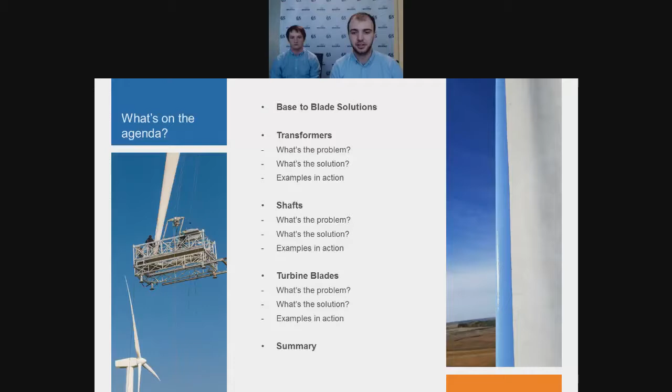So we'd just like to start with a broad overview of the variety of areas on a wind turbine where we can provide a solution. The way we've done this is we split the turbine into three main areas. Starting at the bottom, we've got the tower and the base. There's a variety of solutions here. Primarily, it's the use of liquid membranes for general corrosion protection and weatherproofing, but we've also got concrete repairs for the foundations of onshore turbines, as well as corrosion protection and things like splash zones for the floating foundations of offshore turbines.

Then we move up the turbine to the nacelle. This is where the magic happens and the electricity is generated. There's a variety of equipment here, most notably shafts, gearboxes, generators, and these are all liable to corrosion and mechanical damage. So we've got a variety of products that can help protect from future damage as well as repairing damage that's already there. There's also a few areas you might not have thought of, things like weatherproofing, inspection hatches.

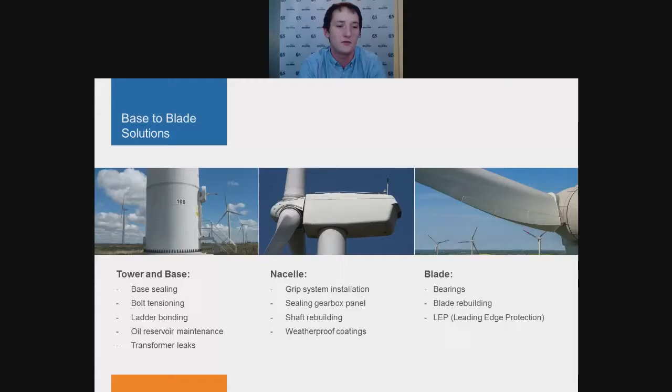And then after the nacelle, we've got the blades. These are the defining feature of the wind turbine. The most common application here is rebuilding the damaged blades and then applying a coating to protect them. But we also have a few solutions for the components where the blade attaches to the hub, such as the bearings. So what we're going to do now is take an application from each of these three areas and go into a little bit more detail on the problem and the solutions we've got.

So the first one, we'll start at the bottom of the turbine, is a piece of equipment that's always going to be present where you're producing electricity and distributing it, and that's the transformer. They're found in various locations around the wind farm. Sometimes they're even in the nacelle, they're not always at the bottom. But a common problem with these is transformer oil leaking from the cooling fins.

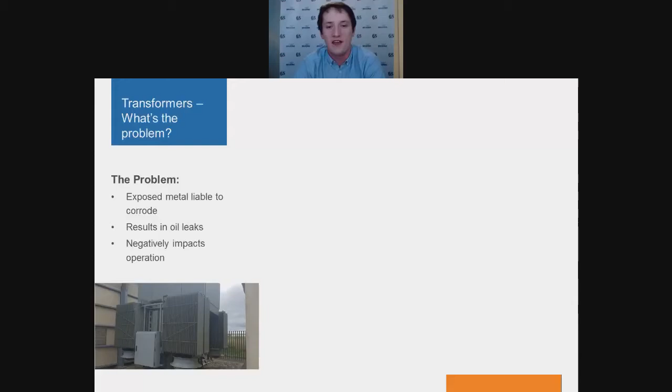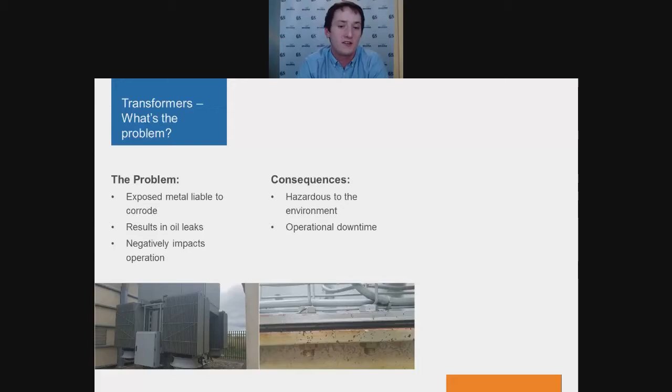The metal on these fins is normally protected with a relatively simple paint system, and that's quite easily chipped or damaged. When that happens, that allows the metal underneath to start to corrode. Left unattended, that will eventually go through wall and lead to cooling oil leaking from the transformer. That can lead to overheating of the transformer, which results in inefficient operation. And in the worst case scenario, it could mean the whole turbine needs to be shut down for maintenance.

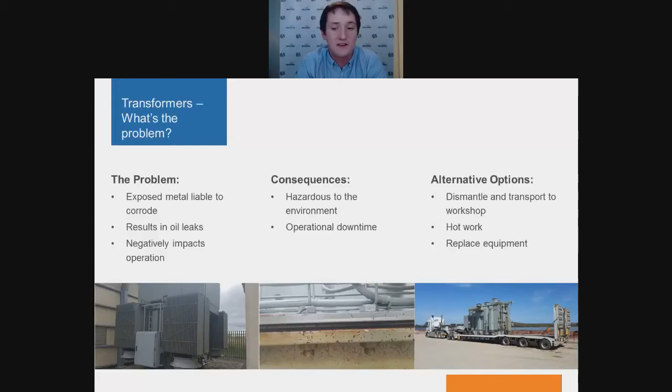In terms of alternative repair methods, there's a few options. First, you could take the transformer out of service into a workshop for repair, maybe remove the fin and weld a new one on, or weld some fresh material onto the defective area. Or, the most extreme option, you could completely replace the transformer. You could take it out and put a brand new one in. The majority of these methods are costly, not just in materials and labour, but also the amount of time that the turbine is going to be out of action and no longer generating electricity.

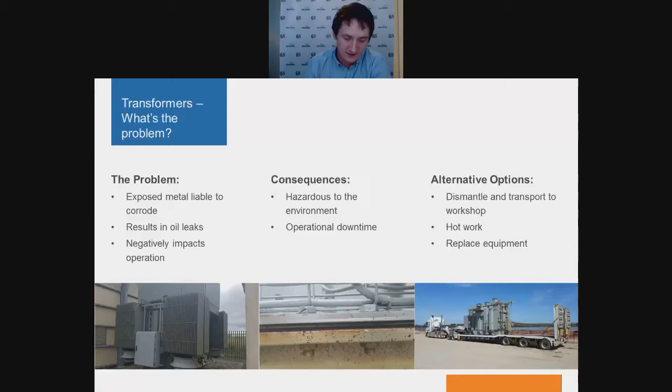So what are the Belzona products that we'll use? The first two we've got here are Belzona 1161 and Belzona 1212. These are both paste grade materials that are designed for rebuilding worn material or bonding a doubler plate on there. The key difference between these two is the cure time. You can see 1212 is a rapid repair. You've got a working life of around 9 minutes, but that also means it's got a faster cure

and a faster return to service. The other product we've got here is Belzona 5831. This is a coating material, it's a fluid grade, and generally you'd use this after you've rebuilt the lost metal with one of the paste grades, then coat over the top with Belzona 5831.

And that'll provide corrosion protection and hopefully stop the damage happening in the future. So a feature you might have noticed on all three of these materials is surface tolerance. Surface tolerance means this can be applied even onto wet or oily substrates. The material will displace the fluids, meaning that you can have a much quicker repair and get it back in service as fast as possible.

So what I'm going to do now is hand you back over to Tom, and we'll have a look at a few examples of where we've already done these applications in the field.

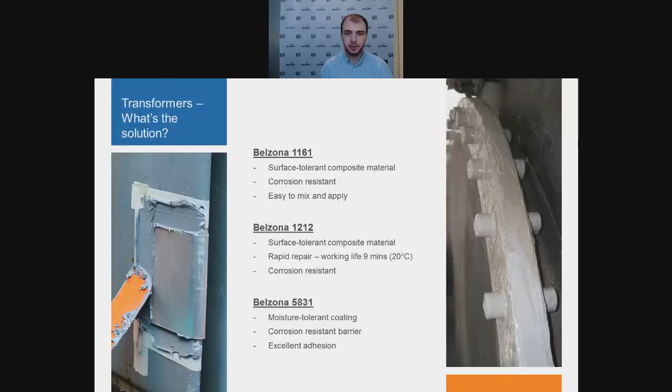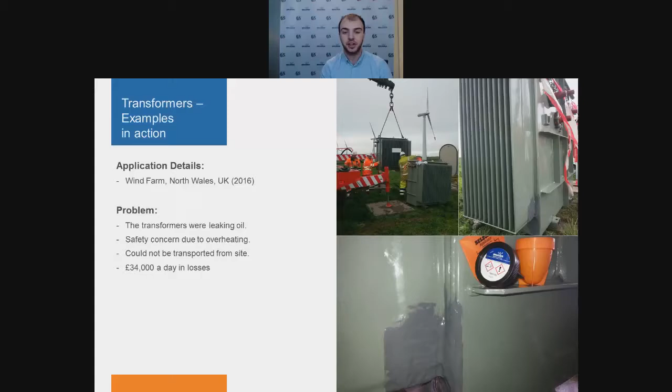But as Dan mentioned, I'm going to cover some examples where Belzona has proven a success for repairing damaged transformers. So this first case history is from the UK in North Wales. The transformer was leaking oil, which was a major safety concern, as well as an environmental hazard to local farmland. The client's original option was to replace with a new transformer, as it couldn't be transported from site for any repairs. Overall, however, this meant that having the transformer out of action had a knock-on effect of £34,000 worth of losses every day. So it was quite a loss that they were making.

As a result, they needed a quick solution, and in this they turned to Belzona 1212, a rapid repair, surface-tolerant solution. This meant minimal downtime for the client as well as maximum protection for the environment.

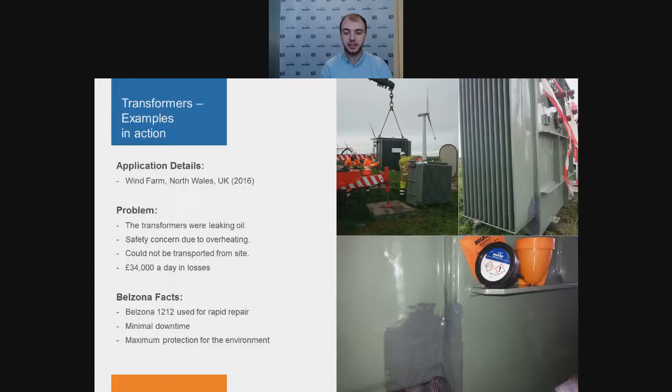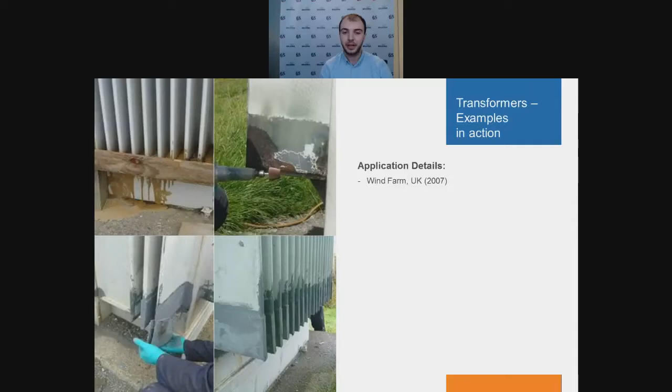So this is another example from a wind farm in the UK. The farmer who leased the land for this wind farm would still graze his sheep in the field. The sheep found that the transformer fins worked very well as a back scratcher. Now, whilst this was great for the sheep, it wasn't very good for the transformer's original coating. This wore away the protection, exposed the fins to the elements, and they began to corrode and leak oil. Now, the client had tried a makeshift alternative, but this still didn't solve the problem.

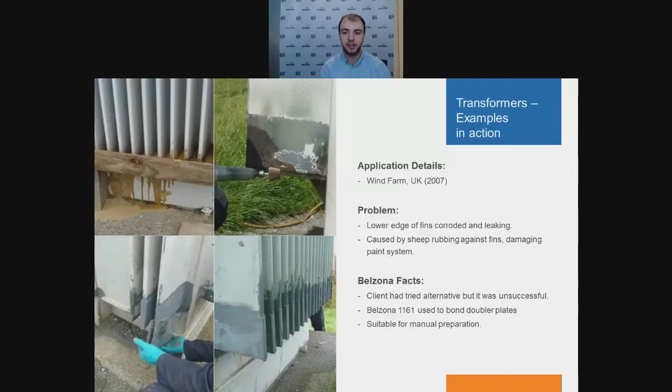So Belzona 1161, another one of the surface-tolerant solutions Dan mentioned, was chosen. For this, it was used to bond doubler plates onto the area, stopping the leak. So overall, a quick and simple repair that meant a fast return to service for the wind turbine. I'll now hand you back over to Dan, who's going to cover our second section on shafts.

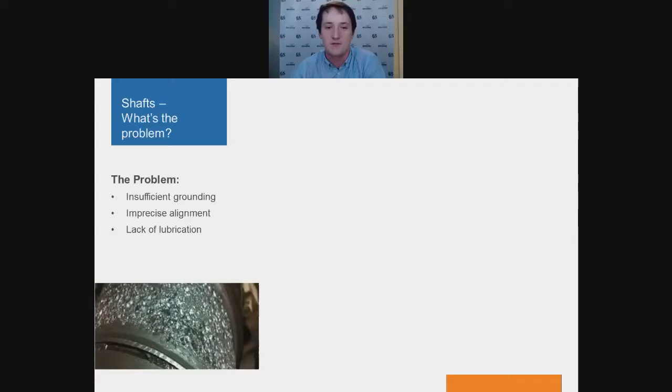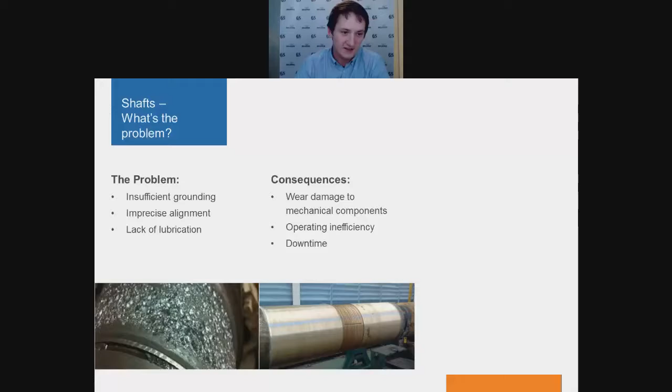So this wear will lead to mechanical damage on the extra components. An imbalanced shaft will damage everything that it is connected to. And a less extreme case of that is simply it just won't work as efficiently as normal. Ultimately, what all this leads to is the turbine being out of action, downtime, and a loss in revenue.

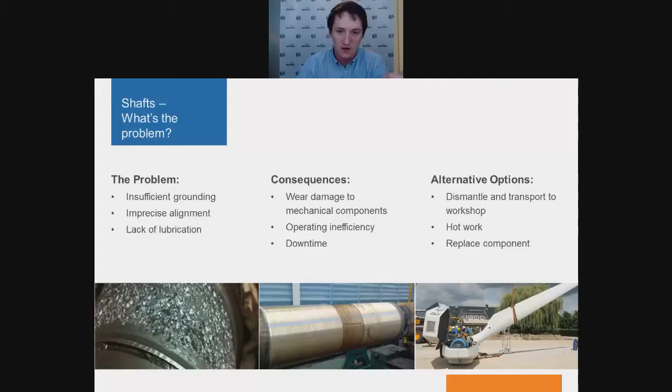So your alternative options are generally to dismantle the nacelle, take the shaft out of action, take it to a workshop, maybe weld some new material on there, machine it back down to its original dimensions, or in some cases you could just completely replace the shaft with a brand new one. And one of the drawbacks of most of these methods is you have to take that shaft completely out of all the different components it's attached to and take it down to the workshop, whereas the Belzona alternative can be done in situ.

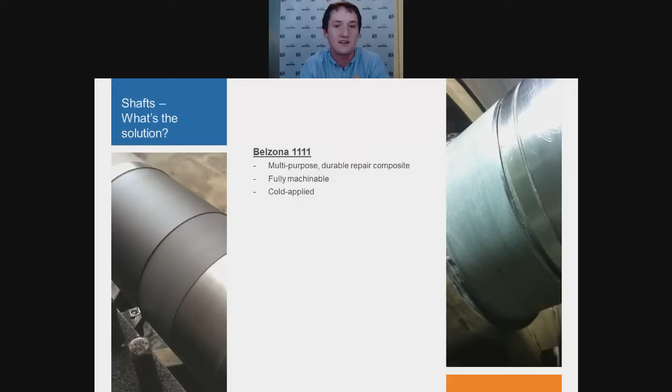So we've got a variety of materials for these. The first one is Belzona 1111. This is the product you're most likely to have seen before if you're not as comfortable with all the products we have. This is a multi-purpose two-part epoxy designed for rebuilding corrosion and wear, or in this case, on the shaft. It can be used to bond plates on. It's a very, very versatile material. Then the other material we've got here is Belzona 1111's sister product, Belzona 1131. So this is very similar.

Again, it's a paste grade material that can be applied in situ to rebuild the shaft. But this one has self-lubricating properties, so it's got a very low friction surface should that be required for the service.

Then the final material we've got here is Belzona 1321. Most of you might know that as an erosion resistant coating, but it can also be used to rebuild the shaft. This is a fluid grade material that can be injected into the area, rebuilt using a former, and the ceramic filled system allows for a higher wear strength as well as providing long-term corrosion protection.

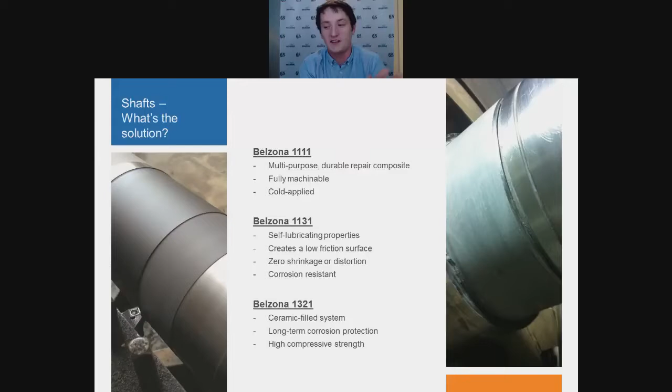So you might be asking yourself, how on earth do you rebuild a shaft using a fluid grade material? Well, we've got a video for you.

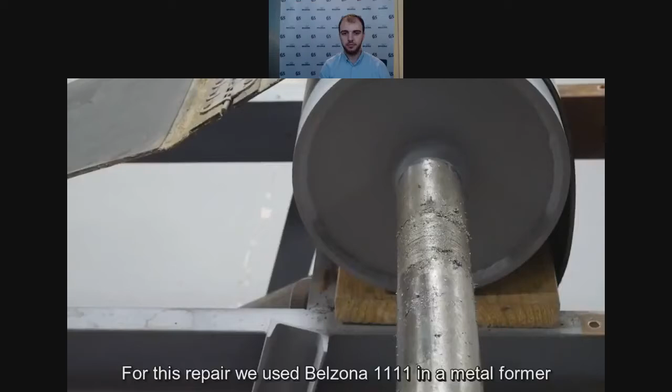In this video, we'll be demonstrating how to rebuild a damaged shaft using forming techniques. For this repair, we use Belzona 1111 in a metal former manufactured with an outside diameter slightly larger than the diameter of the shaft. First, we clean the damaged area of the shaft.

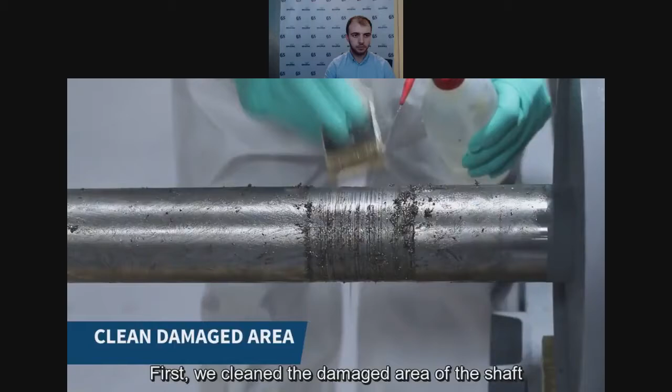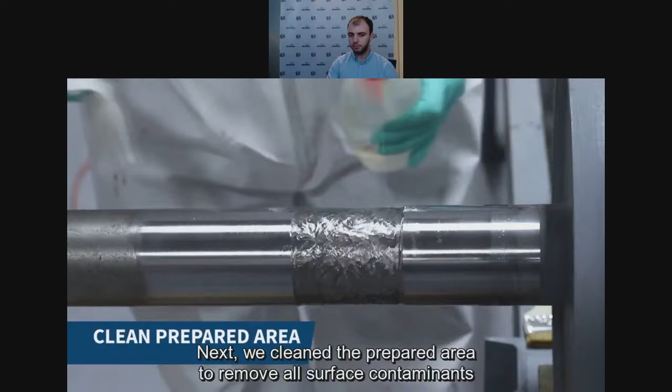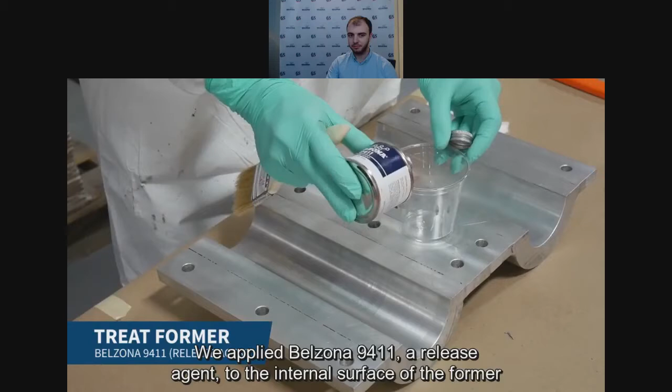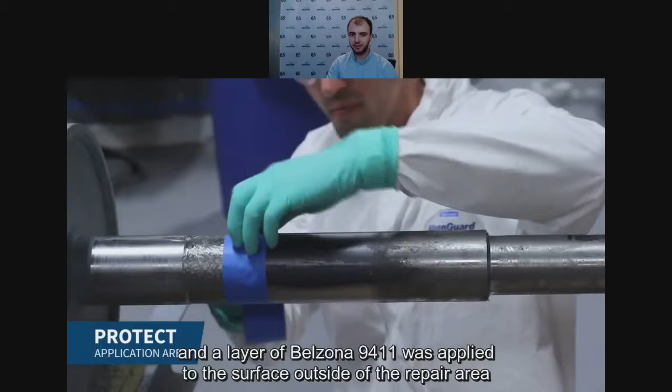We undercut the repair area and roughen the profile with a grinder. Next, we clean the prepared area to remove all surface contaminants. We applied Belzona 9411, a release agent, to the internal surface of the former. The repair area was then taped off and a layer of Belzona 9411 was applied to the surface outside of the repair area.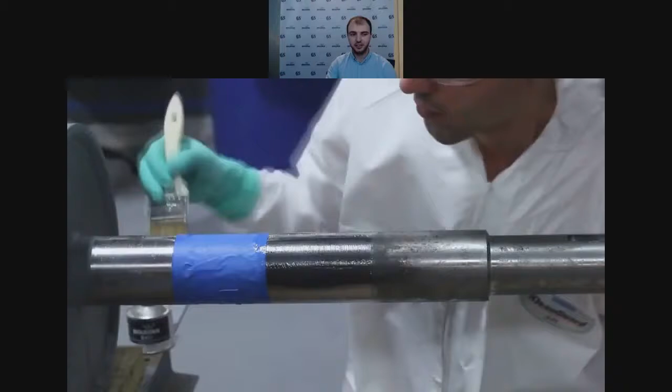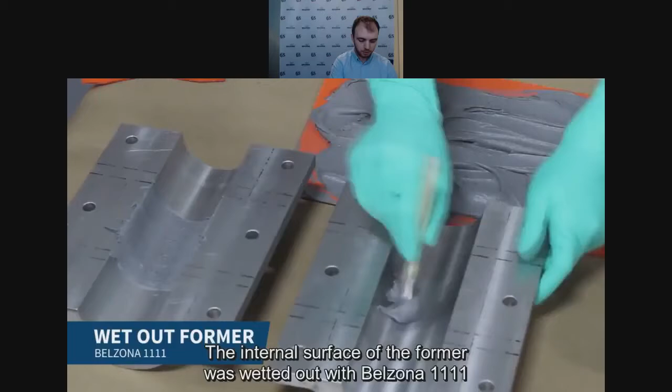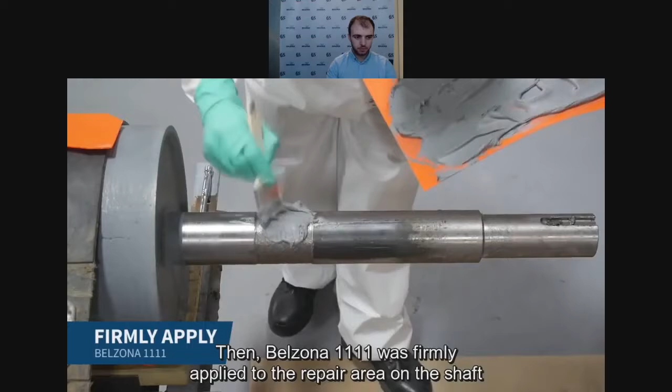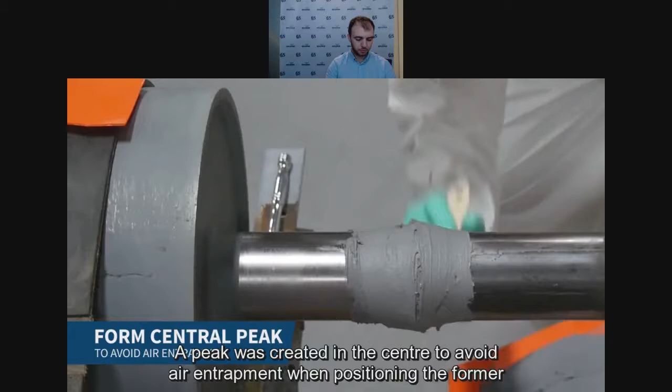Then, we removed the tape and mixed Belzona 1111 until a uniform material was achieved. The internal surface of the former was wetted out with Belzona 1111. Then, Belzona 1111 was firmly applied to the repair area on the shaft. A peak was created in the center to avoid air entrapment when positioning the former.

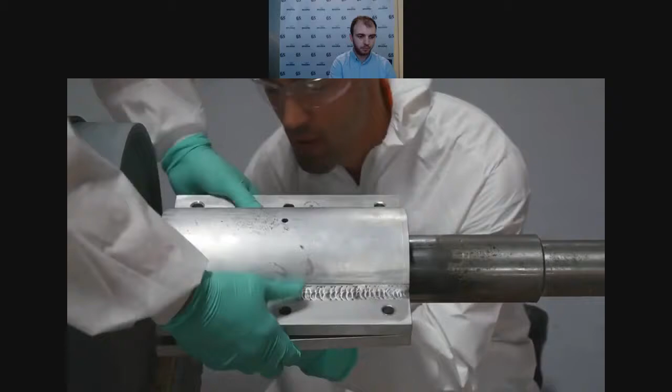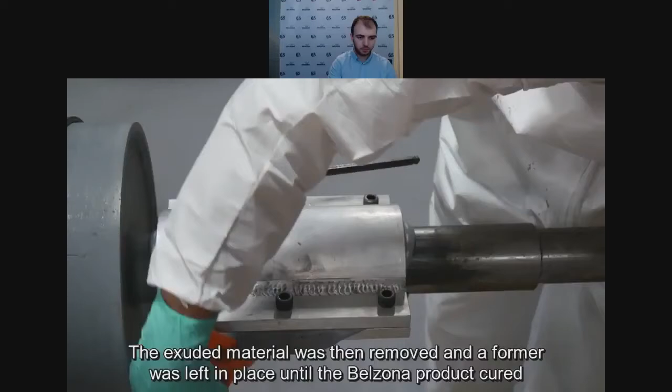Next, we positioned both parts of the former and secured them with bolts. The bolts were tightened to allow excess Belzona product to exude out. The exuded material was then removed and the former was left in place until the Belzona product cured. Once the product was cured, we removed the bolts and the former.

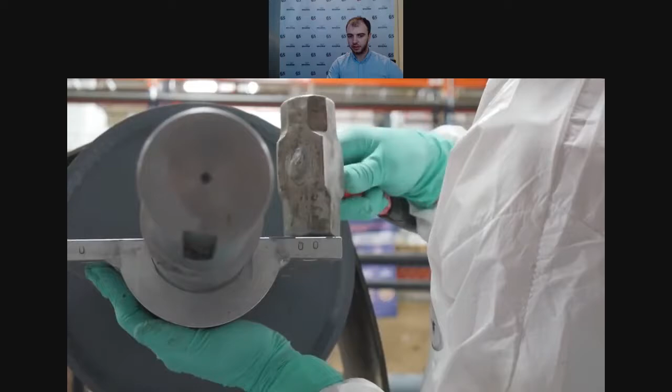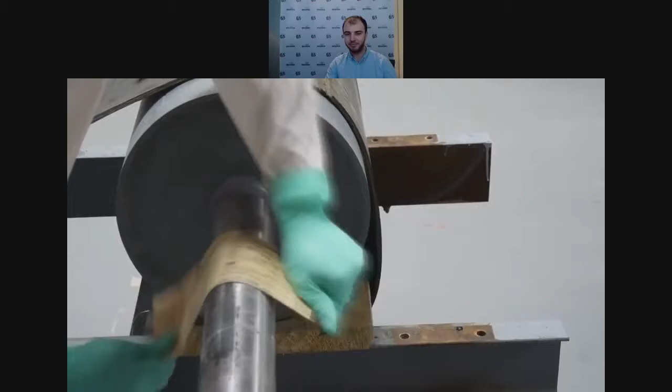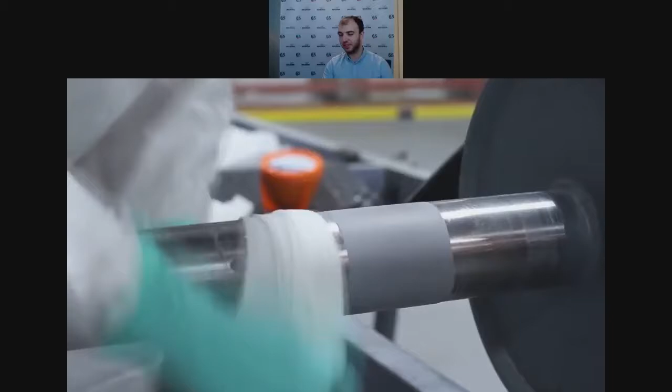We smoothed out the surface of the repair with an emery cloth and cleaned the repair area. Our rebuilding solutions for damaged shafts offer simple applications by reducing hot work and cutting downtime.

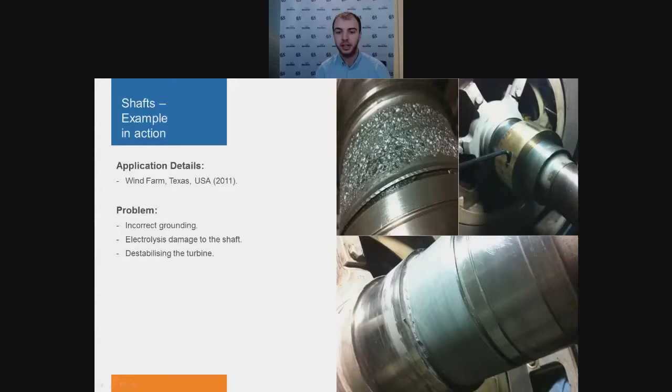Initially, the client's first thought was to take the turbine out of operation, dismantle the shaft, and take it to a workshop for further work. However, this would have led to 2 to 3 weeks of downtime and significant cost implications. So the client used Belzona 1111 and repaired the shaft in situ. Due to the cold curing properties and easy application of this material, dismantling the nacelle was avoided, and approximately $250,000 worth of savings were noted with this simple repair option.

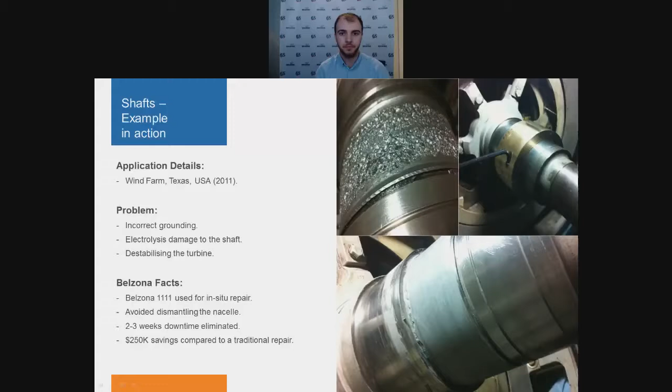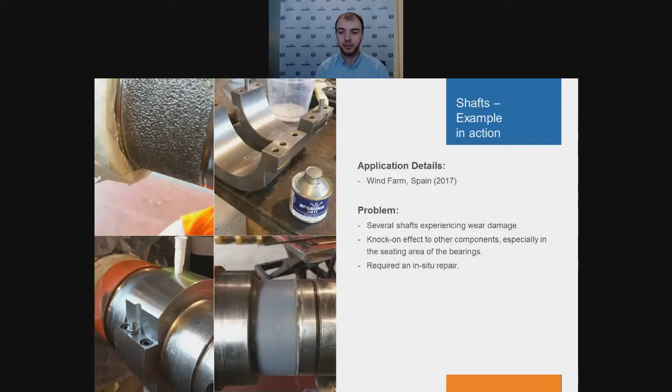In this instance, the customer had the ability to bring the equipment down for much needed maintenance. Rather than employing any hazardous hot work, Belzona was applied via injection, and afterwards the client used several different molds for all the shafts in their turbine. For each of the varying diameters, they were able to inject into the specific mold and reform the shaft to its original dimensions.

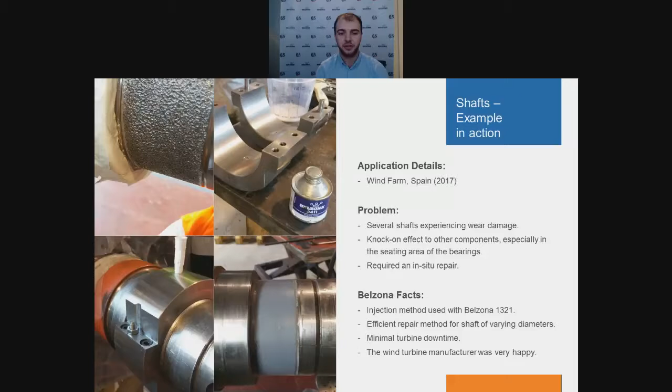As we mentioned, the customer has a selection of different molds suitable for all shapes and sizes in the turbine and can complete the repair even quicker and simpler than ever before. So I'm now going to hand you over to Dan for our third section, which is wind turbine blades.

Thank you very much. So our final application we're going to talk to you about is my favourite part of the turbine, the blades. So although the turbines themselves don't spin overly quickly, it's normally in the region of sort of 10 to 20 RPM. The length of the blades means that the tips are travelling extremely quickly. In some cases, this is up near the 200 miles an hour mark, and this is only going to get faster and faster as the turbines are getting bigger and bigger.

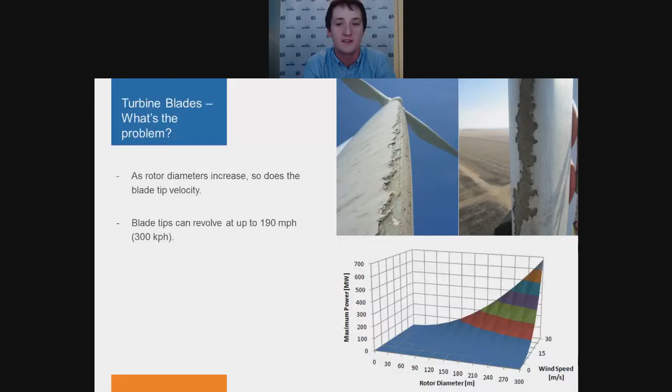Now, the speed of these and the impact of water can cause significant leading edge erosion or damage on the blades, as you can see in those two pictures there. So this damage causes a loss in the aerodynamic efficiency of the blades and then consequently a loss in production. The effects of this can be seen after as little as 2 years sometimes, and the main effect is obviously this lowers the annual energy production. So sometimes this can be as much as 20% if the damage is really severe. You could even argue that it's 100% if the damage is bad enough to cause the blade to split.

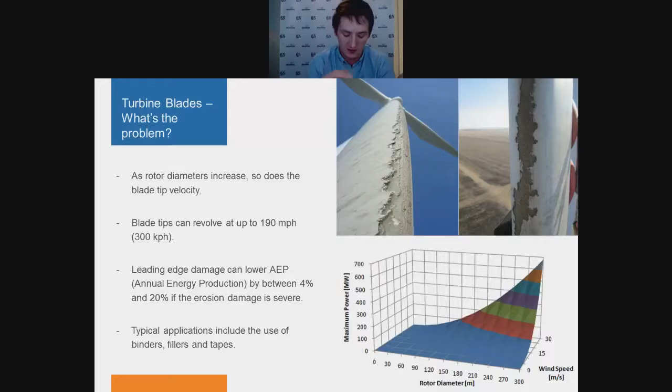So there's various different materials that they use to repair and rebuild and protect these blades. Quite often they'll involve primers, multiple coats, sometimes UV lamps, tapes, various different methods. There's a lot of different products out there to rebuild them. But what we're going to do now is show you the two materials we will use for protecting the blade. So some of the paste grade materials we've already seen you could use to rebuild, but these two materials here are just to protect from future leading edge erosion. So the two products in question are Belzona 1331 and Belzona 1341.

So when you're looking for leading edge protection, you're looking for two things. First of all, performance. Does it stop the erosion? So both of these materials have been through extensive in-house testing, but also external erosion testing. So this also includes the ASTM G73 rain erosion test. In addition to this, we've got a lot of case histories and examples where we've used these materials in very erosive environments. So things such as cooling tower fan blades and high velocity pumps. But we also have examples as well where these have been used in the wind industry on blades.

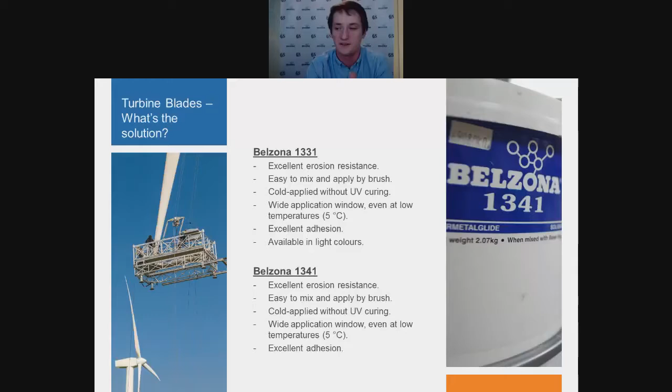The other point to mention about these is the application window. So these aren't moisture sensitive and will cure on their own without any need for external heating down to 5 degrees. So this allows a faster return to service, increases your application window, but it also increases the time over the year that you can get up there and do maintenance. So I'm going to pass you back over to Tom now for a quick video on rebuilding the blade.

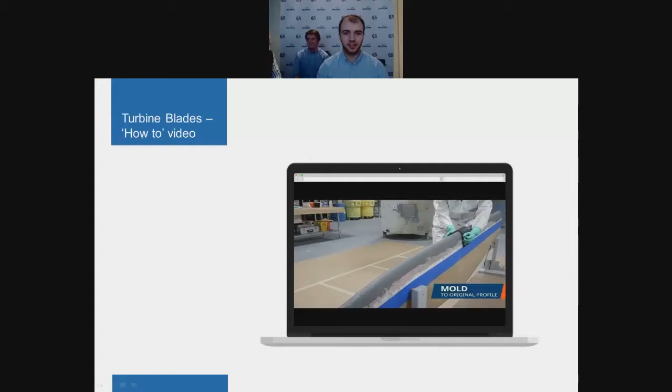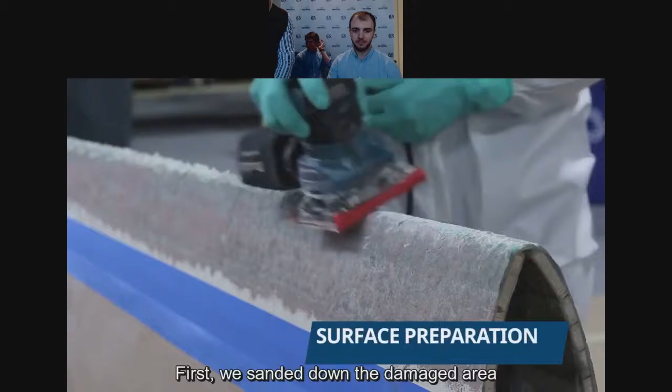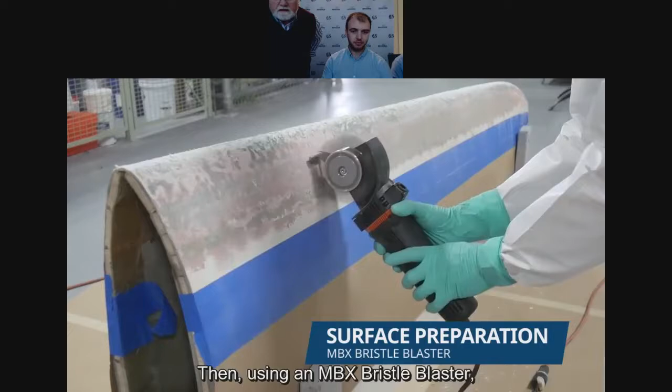In this video, we will be demonstrating how to repair and protect a damaged leading edge of a wind turbine blade with Belzona. For this repair, we use Belzona 1121 to rebuild the leading edge and Belzona 1341 to protect the blade from future damage. First, we sanded down the damaged area and removed the remaining coating and all the loose particles. Then, using an MBX bristle blaster, we cleaned the entire repair area, removed the dust with a brush, and degreased the area to remove all surface contaminants.

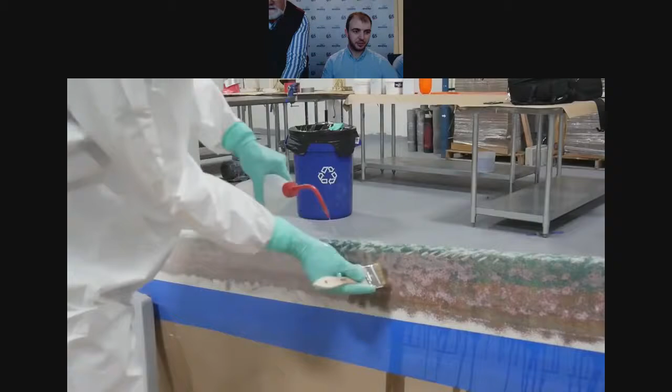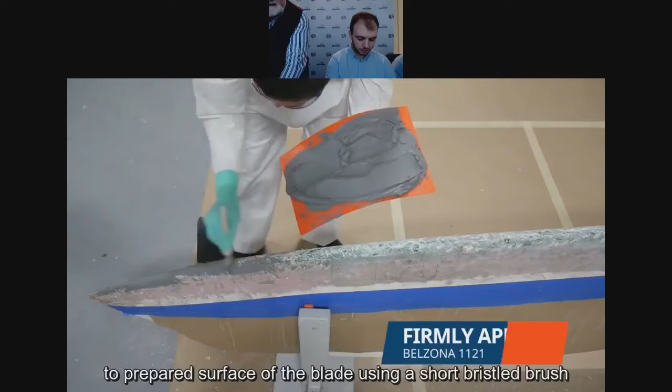We mixed Belzona 1121 until a uniform material was achieved. A layer of Belzona 1121 was firmly applied to the prepared surface of the blade using a short bristle brush. Next, an applicator was used to obtain a smooth finish.

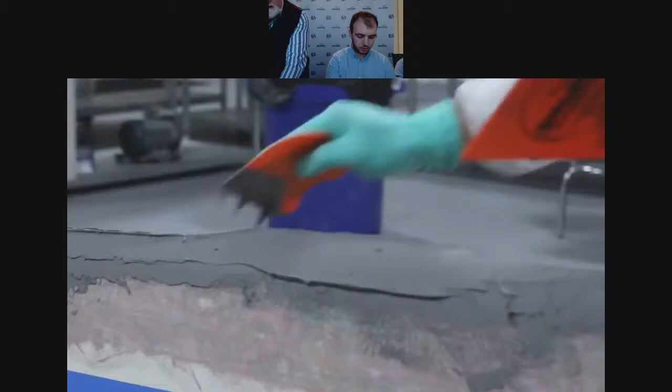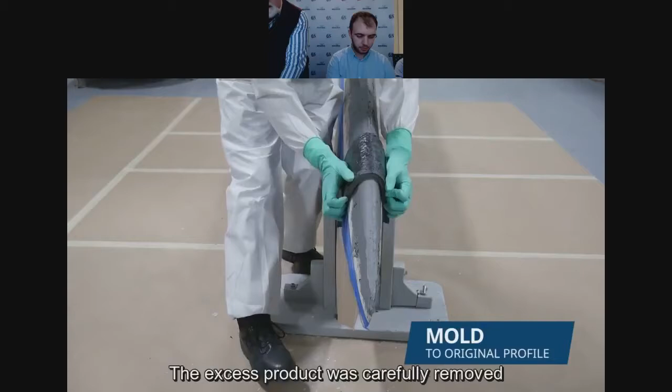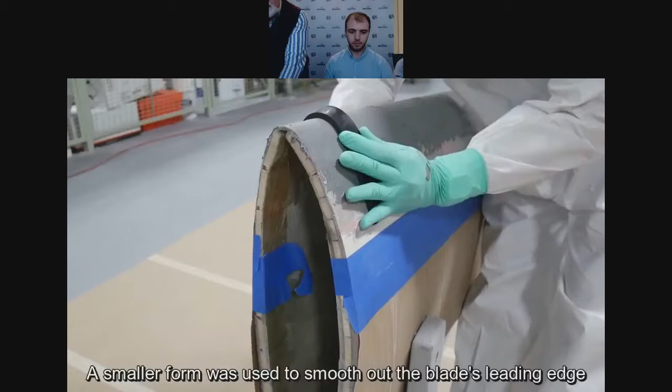The excess product was carefully removed with a pre-formed mold. A smaller form was used to smooth out the blade's leading edge.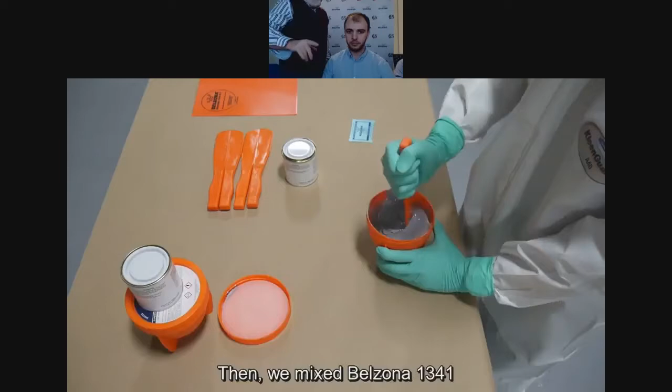Then, we mixed Belzona 1341 until a uniform color was achieved. A layer of the mixed Belzona 1341 was applied on top of the cured Belzona 1121.

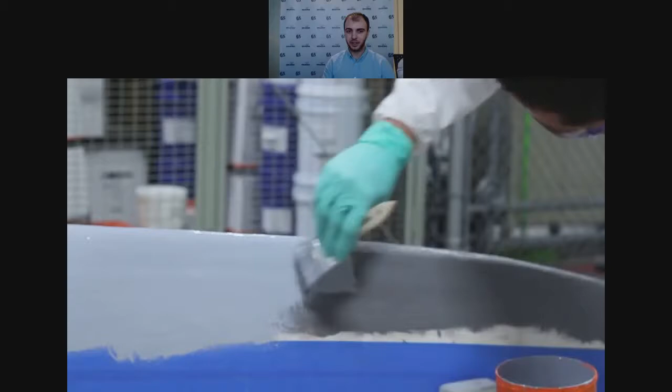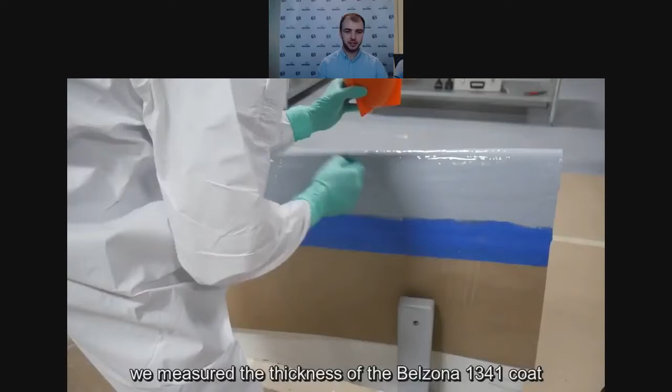Using a thickness gauge, we measured the thickness of the Belzona 1341 coat to ensure it was applied evenly within the recommended parameters.

Okay, hopefully that video played okay for you as well. We're now going to just cover a few examples in the field, and then that will end the presentation and we'll go on to the Q&A session.

So, the leading edge. Oh, sorry, I haven't shared the screen. That would be handy. There we go. Hopefully you can all see the screen properly now.

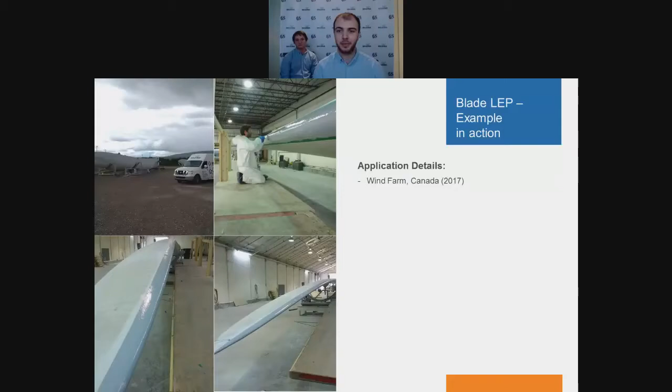So, the leading edge on these blades had started to show signs of deterioration, and the asset owner wanted a preventative solution to stop the effects of rain and environmental erosion. This damage was compromising the performance and energy output, and overall the life expectancy of the turbine. The customer had previously used a competitor leading edge coating, but this was found to be both difficult to apply and hadn't performed very well in service.

So in this instance, the blades were brought down, the pitting was resurfaced, and Belzona 1341 was chosen to provide leading edge protection for the blade. Versus the previous option, Belzona 1341 was easily applied by brush, reducing the time taken to complete the application. Overall, Belzona offered them durability and performance that would eventually save them money in the long run.

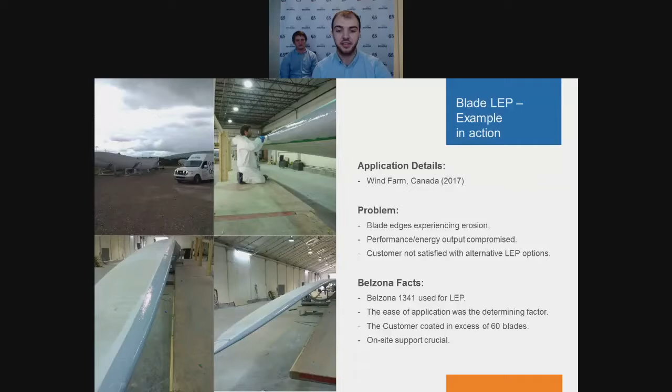So this example actually won our Know-How in Action competition in North America and Latin America last year, and I think the distributor who submitted this is in attendance today as well. This example actually resulted from the customer having seen Belzona's coatings work well within the coal power plant. The maintenance manager for the wind farm had used other coatings previously. These had either had performance issues though, or were logistically very difficult to apply. So Belzona 1341 was chosen once again. In this instance, they liked the ease of application and the smooth finish that it provided.

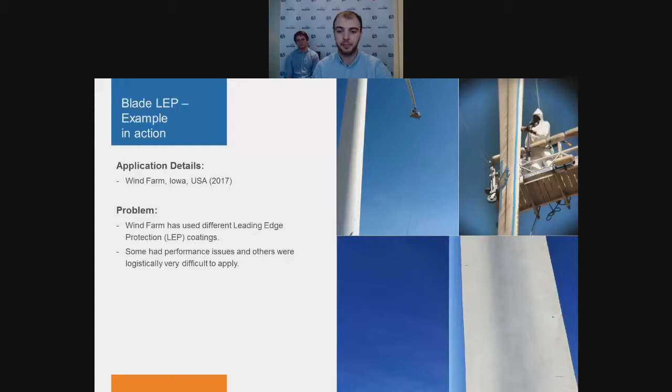As you can see as well, they chose blue actually for the final finish, which is a little bit different to the normal RAL grey typically chosen. This was ideal for the customer because it meant they could easily view the coating from the ground with binoculars, and if there was any damage to the coating, this would show up clearly against the blue, and they would know if they needed to carry out any touch-ups. Which leads us on to another benefit of Belzona in that it wouldn't need to be reinstated along the entire length of the blade. If there was a need for part of the coating to be repaired, it could be done in a small patch repair.

So I'm now going to hand you back over to Dan, and he'll provide a quick summary on the benefits of Belzona for the wind power industry. So yeah, just a final slide just to summarise some of the benefits of using Belzona materials. So this applies to all of the materials that we've spoken about in this webinar. So the cold curing, solvent-free nature of them not only makes them safer to use, but it also helps the application. So there's no shrinkage or distortion of the material while it cures. They all have a wide curing application window, no external heat required, so you can have your turbine spinning as soon as possible. And they're all very easy to use and apply.

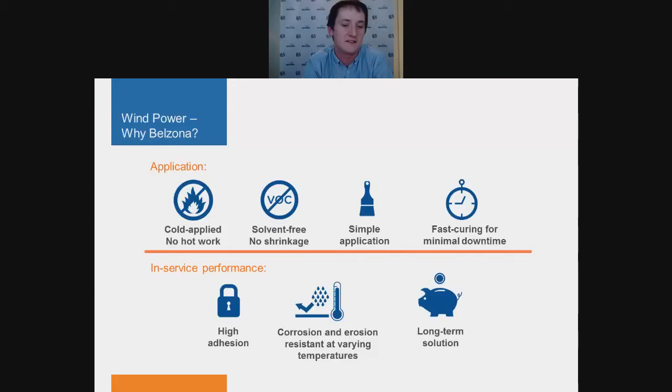In terms of performance, the materials we've shown today, they all have very good adhesion to the various substrates they're designed to go onto. There's way more products that we have in our range than we have time to talk about here for various different corrosion and erosive surfaces in various different temperatures. And the final point to make on these are long-term solutions, so they're not just quick fixes. For all the examples we've got here and many more, we've got case histories of proven performance where they've lasted for many, many years and still in service in most cases. So that is it from me for now. I'll just hand you back over to Tom.

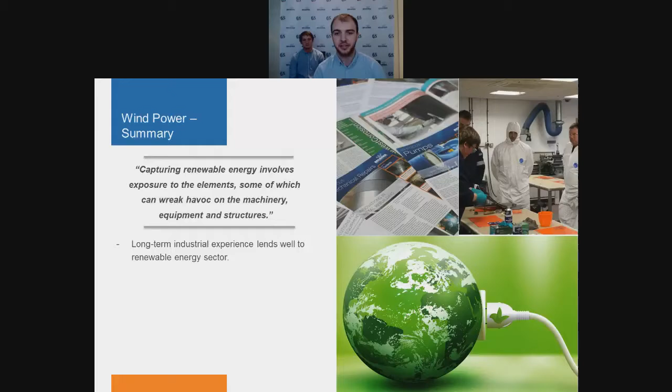Okay, so that brings us to the end of our presentation. We have touched on just 3 of the application areas Belzona can carry out in the wind power industry, but there are still many more which Dan briefly covered at the start. All of these systems have been tried and tested and have significant in-service experience from a variety of different industries and aggressive conditions.